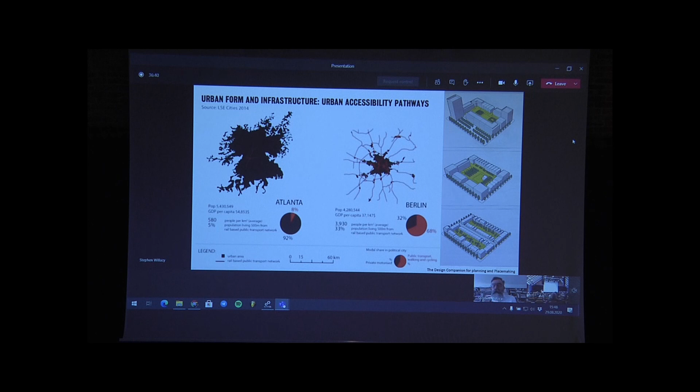Every second year we ask the citizens of Aarhus, what makes Aarhus a good city for you? We've been doing this for the last 4 years, and there's a general tendency happening. The most important factor for people is the relationship to cultural life. Second is the relation to nature and green areas. Third is the fact that Aarhus is the size it is, and you can ask why - it's because it's not too big and it's not too small.

Then, of course, there are a lot of students in the town who think that's important. Interestingly, now we're talking about, in fifth place, the atmosphere of the city, which has jumped up from 10th place last time to this position now.

This is good for me, being a city architect, where I think it's very important when we talk about the way we associate with our neighbourhoods and parts of the city. I'd like to go into some of these themes in more detail.

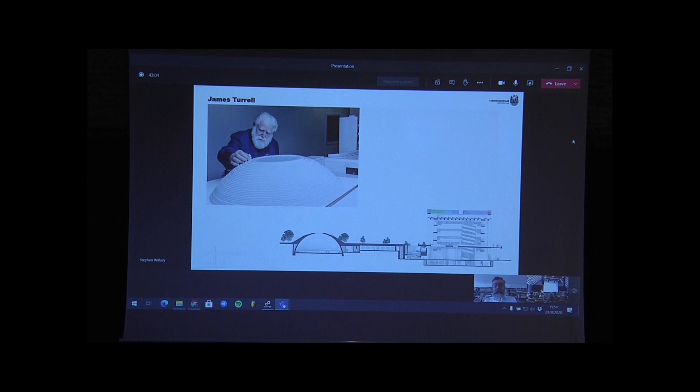But we can't stand and just hang around. We're always conscious of the numbers of people visiting the buildings, and this project here called Next Level, designed by Schmidt Hammer Lassen and James Turrell, the light artist, is being planned, and they've just got the green light to go ahead with this wonderful project, which is underground. It's a big dome underground, but we're working with daylight with this wonderful artist, James Turrell. These are just some images the architects and the artist have made, where they look at the way daylight can be perceived.

Another fantastic project which is just really getting going is called Kongelund. We're planning a new football stadium. A big vision competition is just about to kick off, so if anyone's interested in talent and participating, please go in and have a look. But it's a big area where we talk about synergies in the natural world.

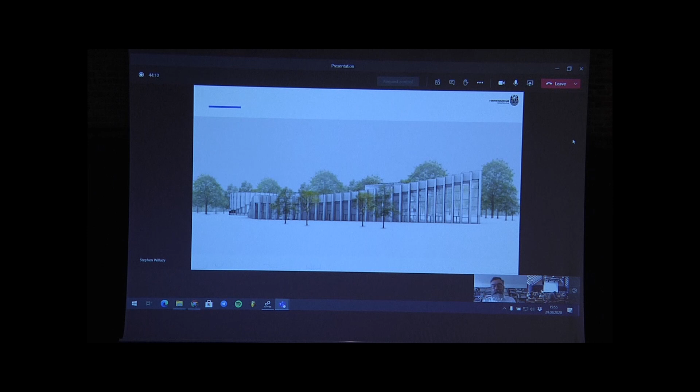And one of the most beautiful of them all is this Moesgaard Museum, which is located just south of Aarhus, 5-6 kilometers from the cathedral, designed by Henning Larsen and Christine Jensen, in a beautiful Ice Age landscape, terminal moraine. We said at the time, how are you going to position a building in this magnificent landscape? And these fantastic architects came with this wonderful idea of just lifting the ground up and slotting some buildings and functions underneath it. It's a fantastic place, well worth a visit.

But smaller projects can do it too. This is the Infinite Bridge designed by some local young architects in Aarhus. We take it down every winter and bring it up every summer, and this is the place where you get married, or you have your marriage photographs taken, obviously. It's a magnet for citizens coming from all over Aarhus and further afield.

So it's not just an important thing for us as a council. We can also see that private companies, like this one, Salling, this building and all sorts of different goods, have actually invested in this interactive facade, with a beautiful lighting scheme designed by Collision Architects. And on the roof of it, they've actually transformed the roof into an urban landscape.

Theatre, outdoor theatre here with a stage. And in the first year, they had 1.5 million guests. This is quite extraordinary, but it means you're bringing people into your shop.

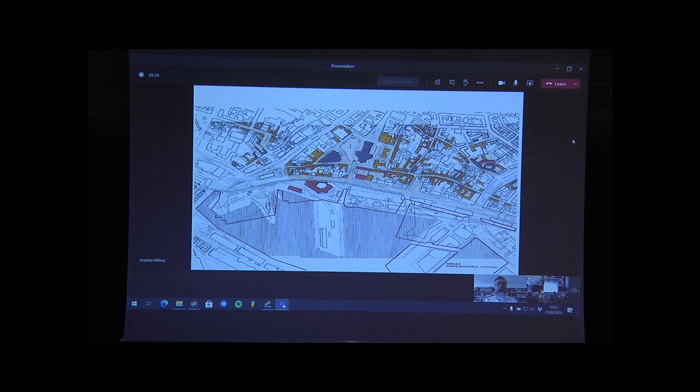So it looked like this back in the 80s, and it looks like this today. I have to say, everyone was against doing this at the time, because look how many lanes there are for the cars and the train. We've cut it down to just 2 lanes, one way in each direction.

Of course, we still have to turn left or right, but it's become a light railway line, and we built this canal here, connecting the water into the harbour front again. No one complains now - it looked like this, you can see.

I sometimes show these pictures to senior citizens, and they say, yeah, they call this the good old days - there's a lot of cars, but you can see that beautiful, magnificent building in the centre here, the old customs building, with vehicles in front.

Now I call this a little piece of Venice, because it's shared space - there's no curbs, there's only cars available for coming to these two buildings for servicing. So it's just become absolutely beautiful.

I know people still think the waiting time for cars along the road here is longer, but it's actually become much more accessible. You can walk across the lines here today, and there's a cycling path here. It's just turned out beautifully.

A considerable investment - I know in many other countries, sometimes they just build buildings on this magnificent site. We've decided to keep it open. And thankfully, through the assistance of Realdania, a philanthropist company, a private company, we've managed to convince them to invest in these projects.

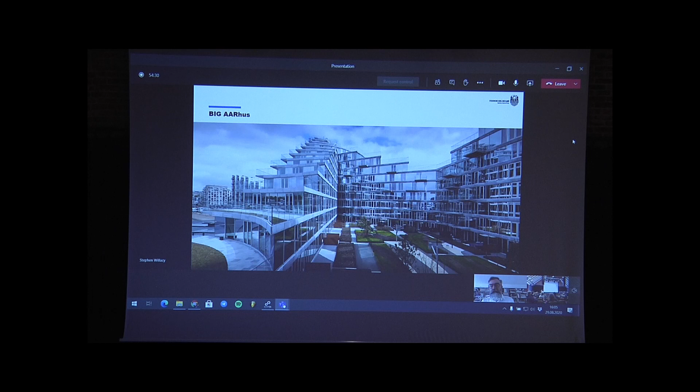Now we have this building designed by BIG on the harbour front here - luxury apartments in this location, privately sold. This is the private courtyard, first floor level, which everyone who lives here has access to. These beautiful small buildings are quite expensive, but you commit to not having curtains or blinds when you're not at home, and you commit to doing 10 public activities every year, otherwise you get a fine. It's an important gesture to encourage engagement on this harbour front.

This is the space between the buildings, made of concrete and timber, with burnt wood - a really interesting material I'm very fascinated by. When they committed to design those houses, they had to commit to financing a new theatre as well, as part of the agreement when we did the master planning for the area.

When we did the master plan, we encouraged architects and developers to come together, but they weren't allowed to make designs yet - they had to talk to us about how they would develop that location for us together. Luckily, Big, together with Gehl's office, won this project, and they've had great success.

So this was basically the master plan idea - housing on the right, and as the local plan was made, the council decided we wanted a big hotel with conference facilities on the area. The building on the left, also designed by BIG after another competition with the developer, features this beautiful mountain - a ramp which goes around from street level all the way around the building, coming up here.

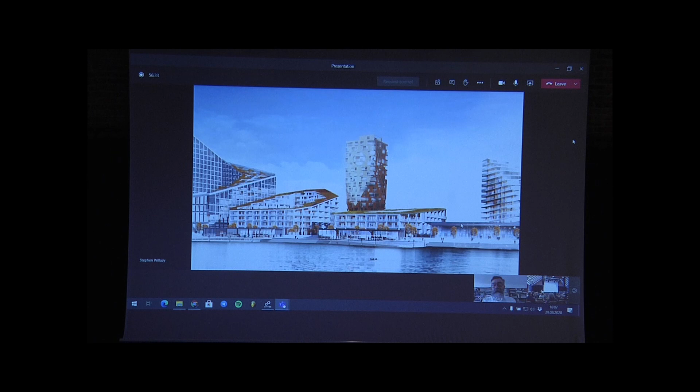You see these fantastic terraces, and the neighbouring buildings - houses with shops on the ground floor level, designed by SLETH architects. While the building site's going on, we call this the 'building site fence' - a livable fence. We've got temporary shops, cafes, restaurants along this promenade, and it's an incredibly popular place with all these different functions. The developer has committed to do this throughout the project.

The local financing group, Salling Group Fund, has supported this outdoor swimming area in the plan. Within the first month, back in 2018, there were 100,000 guests - obviously before the coronavirus situation. It's an incredible magnet, very popular in the summer.

This is how the conference hotel will look from the boulevard, with the ramp coming up to the top.

While we've been working, the master planners had this space between the developments. We built this park area called the Green Line in the centre, also financed privately with some support from the council - each neighbouring site has also committed to help finance this project. This is from the opening.

One of the interesting things while we've been building the project is this fitness centre has grown. That gentleman in the middle with a weight above his head is an architect from town, and this picture was taken last week - you can see them laughing because I had to stop and take this picture, thinking this is livability. It's fantastic - very happy, health and well-being, greenness, biodiversity, fitness. Just behind these people is this building.

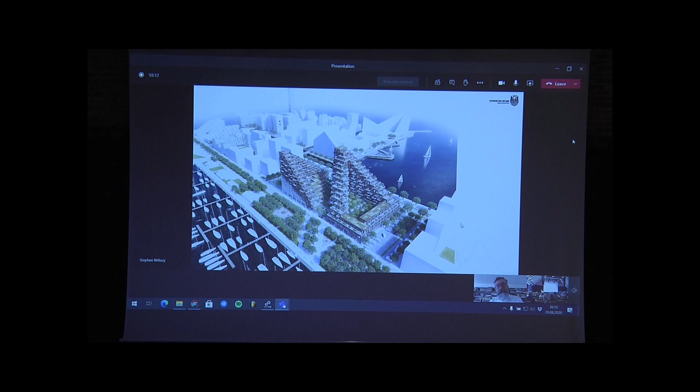Another project just coming out of the ground, Nicolina Hoes. This site just illustrates the next stage, which is going through local plan phase now. This whole area here is in the process of being developed, and we're talking about first sites coming to sale as we're talking now. A new school is being planned, and also some elderly homes integrated.

And the whole area here has to include 25% social housing. So when we sell the sites, we have to make it available for that group of house builders to be able to buy in. So the money is used to reduce the price of the site for these projects. They have to be brought in on the prices for the other sites. So this is a model we're working a lot on.

So some more projects here I'd like to go through, more urban. These four sites - this one here, the Godsbane area, the old freight yard area, is well on its way. This one here is just being completed as a plan.

And this area has just been made public and available for the public for commenting. Next week we're having public debates around it. So this is the site. This is the first image which came in the newspapers yesterday. It's covering the old railway yard.

There's a kind of an important point here, that the National Railway Services and private developments and the council are working together to try and get this to work. We've committed to building 110,000 square metres, but we've said it has to be car-free, and we want it to be as green and friendly as possible.

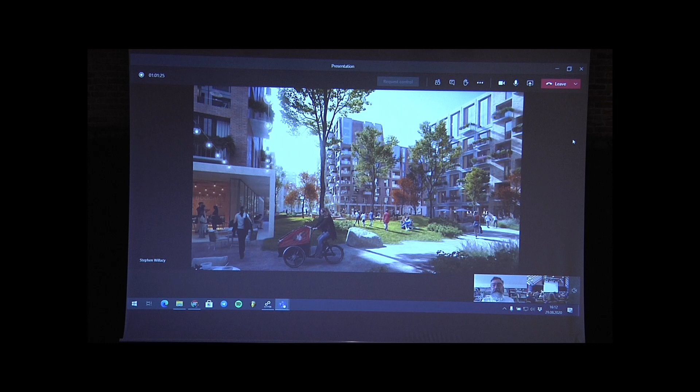I call it the Nolli map. You being architects, you know what I mean. I said we have to have that map of the plan of the building, the location of the shops and the external activities located in the plan before we go forward.

Because we have to commit to making these life activities on the street level before we get going and start building the district up. And this has been a bone of contention with the developers, because they really want to know how many square meters and where they want to put them to be able to make their project available. And I said we have to insist that we work this way, otherwise we're not going to get buy-in from the citizens or the politicians.

Because I have a lot of support from the politicians with this way of working.

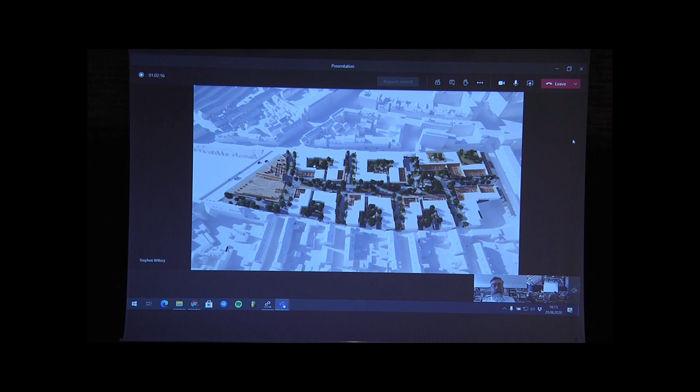And this is what it looks like looking from the railway square. I think there's a lot of possibilities. These are early sketches - there's always a terrible situation. I think this hasn't been presented before, but when it's presented now, it looks like it's a done deal. And the citizens, you know, they're very apprehensive, and they think we can't change anything, but that's not the case.

We have to show something which has some kind of realism in terms of economics and sustainability, but we have to integrate all the other social and cultural aspects of the planning too, and obviously the environmental. Next to this area, there's a project that's been on the board for like 8-10 years.

It's called the Necklace, Pearl Necklace, and it's a project designed by COBE and Transform. And the site I just talked about is down on the left here. But this is a project we're actually trying to develop together with those different partners again. This is the old bus station, and something we're very keen to think of the whole area as one, so that when we think of planning, we're talking about holistic planning across this whole area.

Close by, next to the freight yard area, we call it the new Brokvarter.

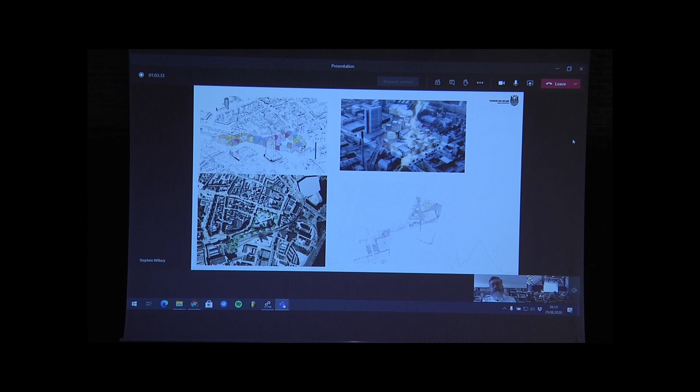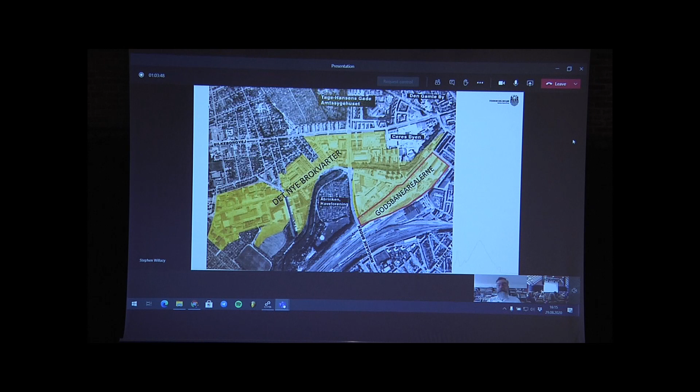There's an area here for 15,000 citizens, which we've been working on for the last 6 years. These are the different sites being built currently, and these are images where the local plans have been approved and they're well on the way. This is a site next to it, and you see the Godsbane just down here.

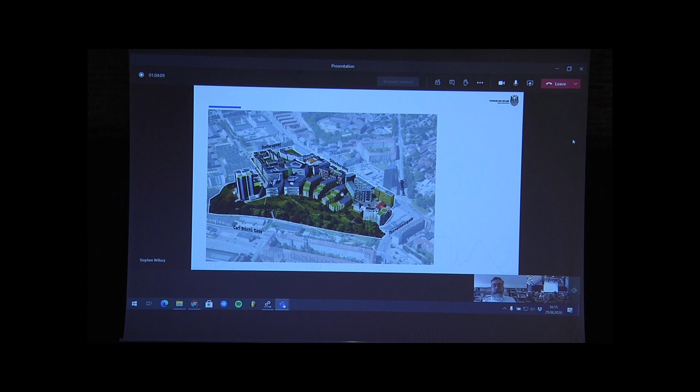This is 147,000 square meters, including education, housing, shops, and offices, a mixed-use development here. This is the site as it looks today from the park. Very successful, everything's rented out or sold, very popular, with all the office spaces and universities working very well.

So this freight yard here, what is called K, because culture in Danish is spelled with a K. The creative quarter looks like this, and has for some years. Whilst I've been planning, a group of people called Institute X have been inhabiting the area with lots of different activities.

We've made some planning documents to help us develop the area. This is in the wrong place - this is Ceres Byen, where we have some offices. But I want to get back to the Godsbane, the freight yard area, where this is the Cultural Production Centre, designed by 3XN and E+N architects.

This roof covers lots of cultural activities, theatres, and workshop areas. This building on the left is not insulated, but it's a very popular venue for concerts and lots of different activities - a beautiful space to wander around and come on top of.

But the important thing here - this is my town mayor, Jacob Bundsgaard, and this is Mads Peter Laursen, who was like the leader of Institute for X. They work very closely in relation to making their opinions known in terms of the planning.

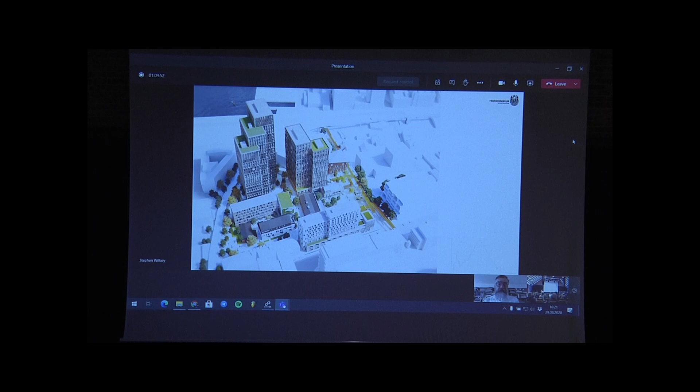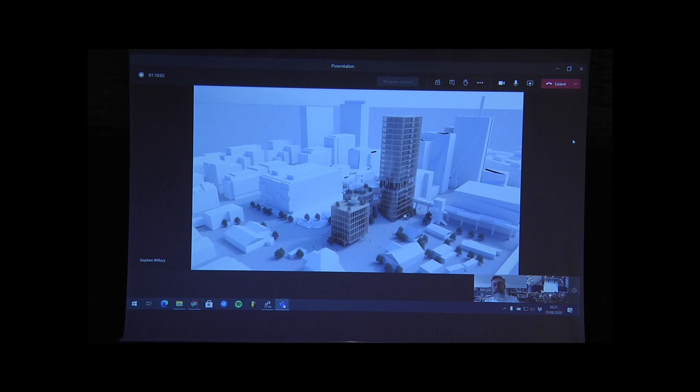One of the towers is going to be built of wood. This is by Lendager Group, together with Wood Kilden, and it's a very exciting project. We haven't got much info on this just at the moment, but we see it as a very interesting pilot project for state-of-the-art timber constructions.

They're talking about actually using reused windmill wings made of fiberglass as sunscreens on the facades. It's interesting.

This is a hotel, and they're integrating a swimming area, health and wellbeing centre, and reused bricks in the building.

All the buildings down here are 2 or 3 stories, so that's low scale, livability scale, whilst that means we're pushing the buildings up in height elsewhere, making this a much cozier area. As you can see, we're talking about small scale streets and intimacy.

This is a thing I'm very concerned about. When we talk about these intensive developments, we must talk about intimacy more in terms of the scale of the urban realm and the qualities we're making. So this is a very important part of the coming politic for architecture and livability.

You can see there's a coal crane bridge here, which is reinvented and used as a connection tool up to the main railway station. But you see this intimacy has been very important here, so there's lots of reused bricks and small human scale materials where people are.

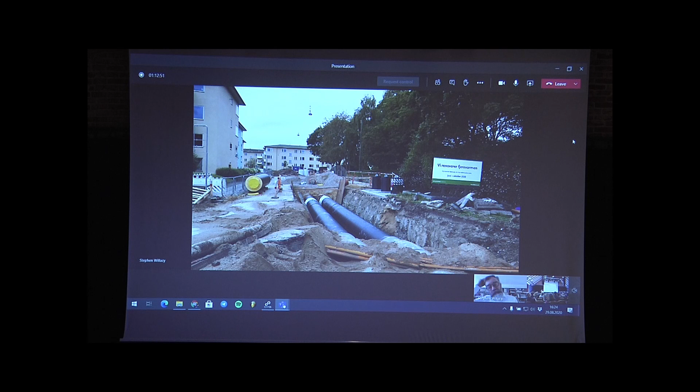So we've gone from fossil fuel for our power station to biomass, but we know that's also - I wouldn't say peeing in your pants, but it's got a nice flavour to it. It's reduced our carbon footprint by 50% by doing that, but we know that you just cannot carry on using biomass alone. So we're talking and looking at now making these solar panel parks, and also how to integrate these windmills into our projects.

The important thing now is that there's a lot of discussions, a lot of citizens and people living in these areas who don't want them, but we're making a point that if we want to make a global impact in terms of energy, so we're green and CO2 neutral, we have to start thinking in another way. So, of course, we have to have accountability in terms of design and where we integrate it into our landscapes, but this is where we start discussing what I call the climate aesthetics of architecture and landscape planning.

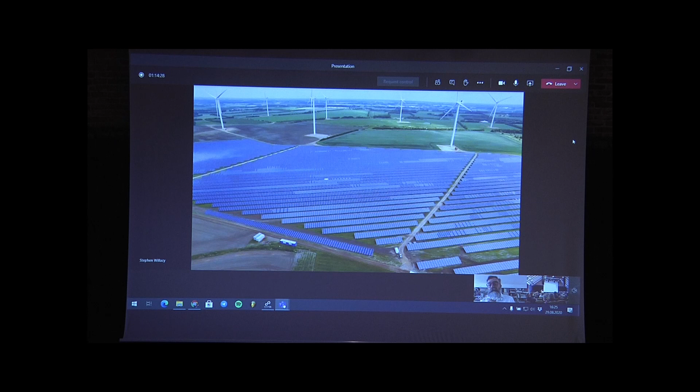Likewise, when we talk about water, flood management, we have many SUDS projects all over the city. All our housing schemes now have to deal with their water locally on each site. They cannot move the surface water further down the planning. They have to deal with it locally.

And of course, one of the largest challenges we're facing is mobility. We can see here that by 2035, the use of cars will probably increase by 20-25%. That's gone from 720,000 trips a day to 750,000 a day, and that's just not going to help matters. So we're working on lots of different strategies for increasing the use of public transport, cycling, and so on.

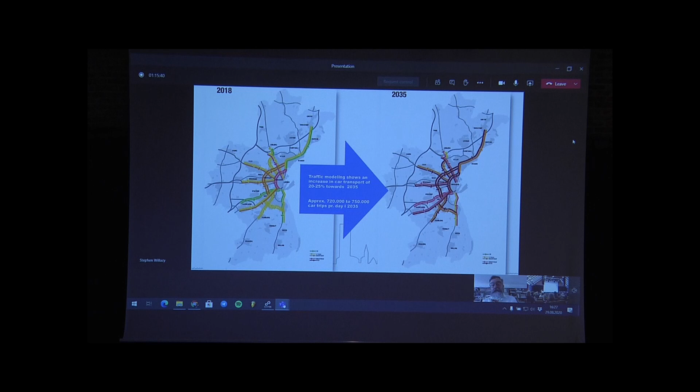Aarhus is the city in Denmark with the greatest number of new cyclists, mainly due to the use of e-bikes. We've got quite hilly terrain in our area, and I must say, I'm overtaken all the time by these electric bikes, and it's fantastic. The numbers who would normally not cycle are starting to cycle.

But we have a challenge in the town because they cycle quite quickly. We've actually started, during the summer period, reducing the speed of people on their bikes down to 15 kilometers, saying although you can drive through the area, you have to drive through with respect to the citizens. So these different parts of the town have been brought into play during the summer. We're making flexible strategies for the summer periods where we can encourage mobility, going, walking, cycling, but at a slow pace.

And of course, this whole greening of the city, biodiversity, is very high in our planning. The integration of water and greening into the urban realm is a win-win for me. The quality and the livability of the urban realm will increase because the traffic areas have often been sores in the urban picture. By introducing these green elements - this is 3 years old now - we have these beautiful different types of planting, which we're not cutting, and these trees in the inner city have just made it beautiful. And it's differentiating between the cyclists and walking, and also the cars.

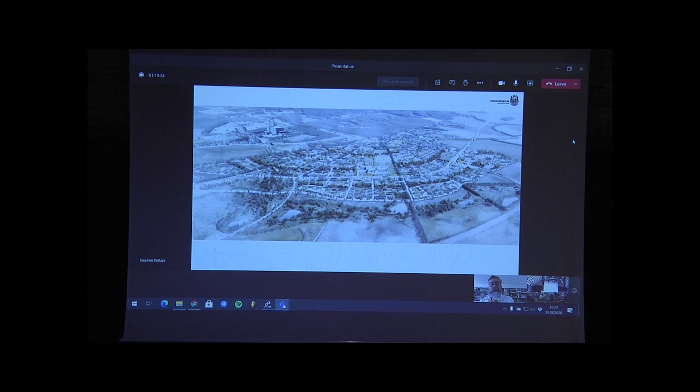On the outskirts of town, we're designing a new town for 25,000 people. It's on the light railway line, so this is part of our strategy. And we're talking about different ways of working with materials, reuse of brick, new ways of working with timber.

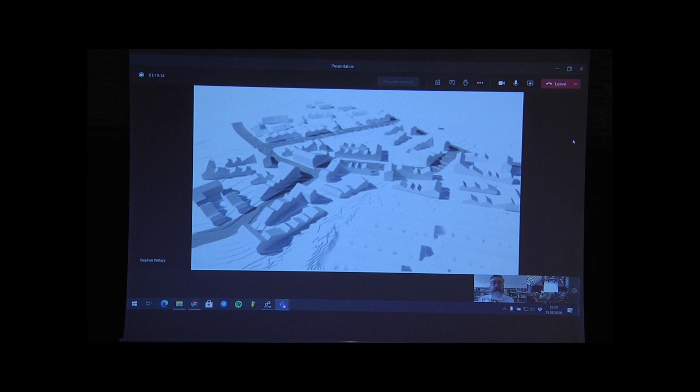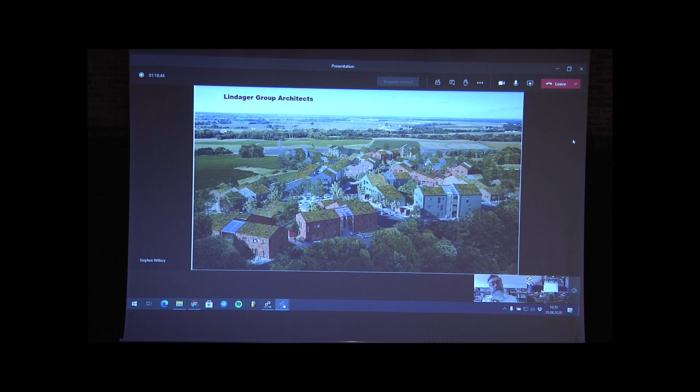This is a housing scheme by Lendager Group, which is going to look like this. It's just got planning permission on site. This is all built of recyclable materials and with CLT frame walls, interiors, and it's really new for us. When we do the planning process, we're not even sure that those materials that are drawn are available at the time of being built. So this is something we're trying to develop, new ways of building trust in relation to these projects.

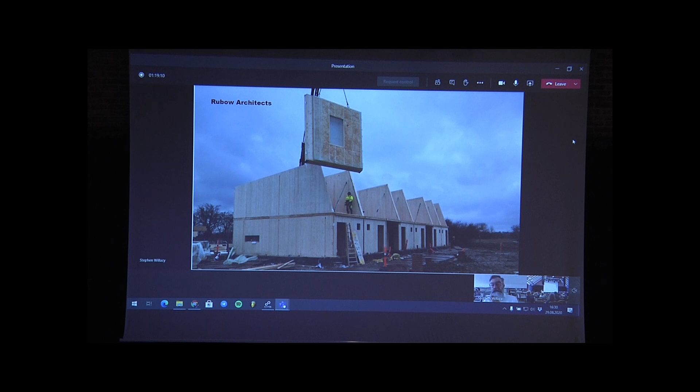But CLT is the way forward. As you can see, this project in Lisbjerg for a housing association called Ringgården looks like something like this just after it was built. A new one by Vandkunsten, also for a housing association, 4 stories high, combination of concrete staircase, elevators, and CLT floors with concrete on, fire restrictions and so on, also with steel elements. So it's a composite construction, but very interesting, very successful.

And most recently, the new fire station is going to be built in Lisbjerg, designed by Rubow Architects. They're actually going to make the facade of burnt wood. Just love it.

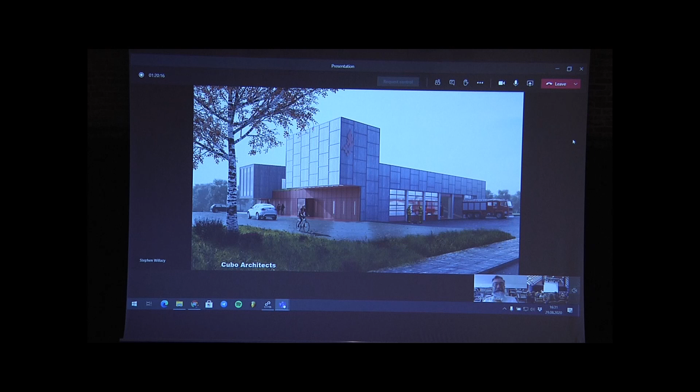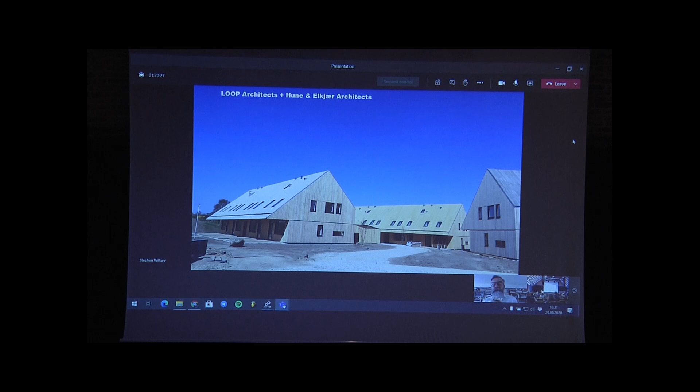Nearby, this scheme called Inu, a private development, beautiful timber project by LOOP Architects and Hune & Elkjær. I just want to go through these quickly. Just fantastic projects in the outskirts of town. This is on the same site, designed by BIG, going to be built in timber, which is very exciting. This tech group,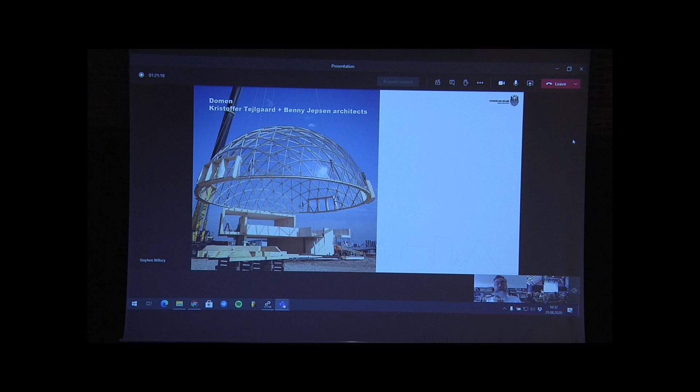And we have lovely projects like this. The Domen designed this pair of architects. CLT combined with state-of-the-art light geodesic structure, and reuse of materials again, a new housing scheme in the inner city by Kant Architects for a Housing Association. And the interesting thing is, it's the housing associations who seem to be breaking new ground, pushing the envelope. It's not always the private developers.

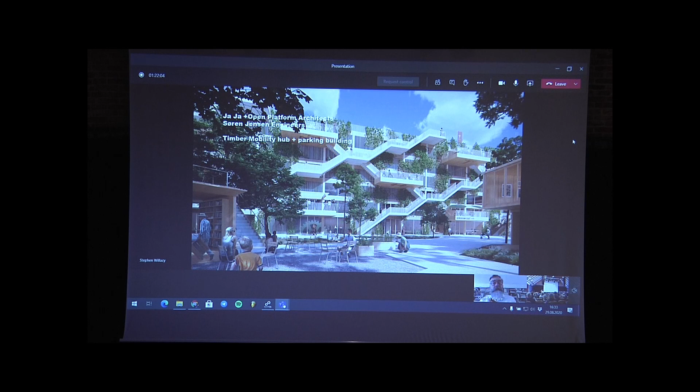So we are trying to push this. The private developments have to be more innovative in the urban sustainable agenda. One of the projects which is on the board at the moment is a new parking building in the Southern Harbour District. We're in the process of negotiating. This is the winner of the first round. We have 3 we're negotiating with, but this was the plan for making a car parking building for 700 cars of timber. So this is very exciting for us.

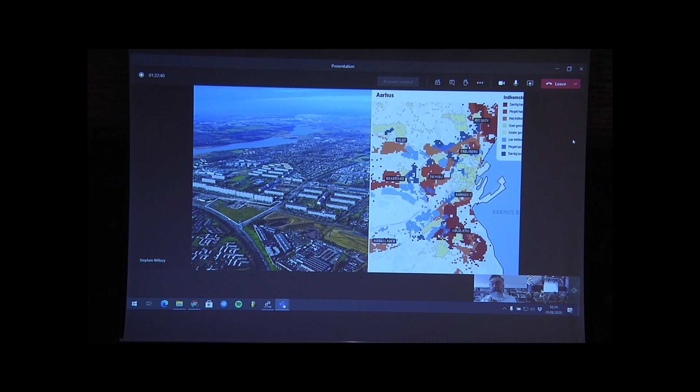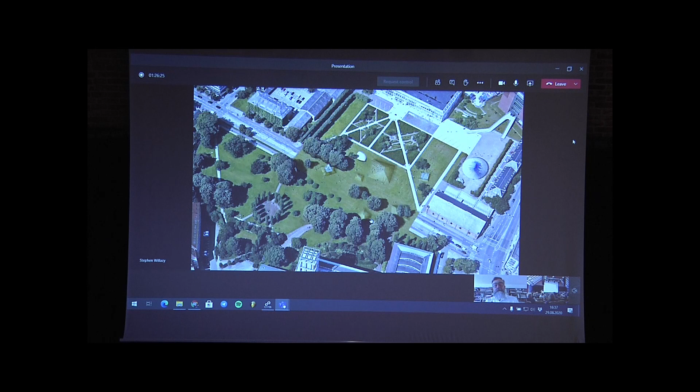It just became an urban realm. The play schools came here every day, families came with their kids, they just covered the area with grass, and it became an incredible mecca for livability, people just coming in. It's right next to the town hall. This is a railway station space.

Architects covered the bus shelters here with this pyramided wood. This hot dog stand was made by this. All these colours are inspired by Bauhaus, and this lighting scheme here, there's an advertising stand behind that, were completely transformed. And activities started happening spontaneously.

There's a stage on this side and on the other side. You could come out of the station here, you could actually hear birds singing. It was wonderful. And we're in the process of planning how the light railway line goes through this space now.